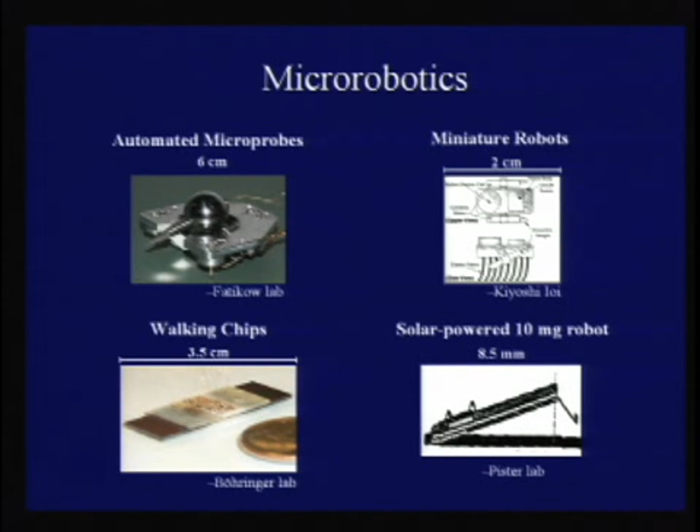And that's the big challenge that you face in microrobots, and it's a fundamental engineering or maybe even scientific challenge to think about. There are many components that you build on in this kind of work, and there's a long lineage of this. So I'm going to talk about some of these challenges briefly.

One of the hard things is how do you deliver power to tiny things? You can't have a wire to power them, because in terms of scale, it would be like having a mobile robot this big with a steel beam attached to it. So you just can't do that. You need some other kind of technique. And there are robots at this scale, but how can we get an order of magnitude smaller?

One of the technologies I'll build on is a device called a scratch drive actuator. I'll tell you all about this, so don't worry if you don't know about it. But the key thing about this actuator is that it's tethered—it does have a wire attached to it. So in some sense, years of work to get rid of one wire, but that wire is essential to make something that's not tethered, because I think a robot at this scale shouldn't be tethered.

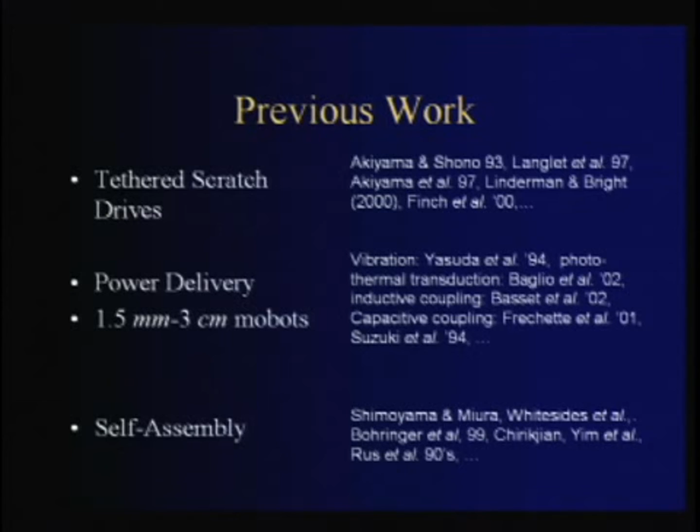Now, what can you do with microrobotics? This is kind of speculative, so I say possible—there have been a lot of interesting applications proposed. From my point of view, I'm interested in building something generic, a capability, like a car. The Model T didn't do very much, but it was clearly a transportation and hauling platform. If we can make a globally controllable tiny microrobot, we can haul things around and push them.

Some applications I think are most interesting—I'm in a medical school, so I'm very interested in biomedical applications. For years I've been interested in manipulation by pushing and pulling things, which is good to do at the microscale. My colleague Daniela and her students are extremely interested in self-reconfiguring robots that can change shape, and it's possible little tiny devices like we're making could serve that application.

But one of the ones I'm most interested in is self-assembly—how can you make a system that builds itself? If you think such a thing sounds far-fetched, the other half of my lab actually studies these systems from the biological side.

Here's one such self-assembling system. Like all proteins and protein complexes, this is self-assembling. This is the structure of an enzyme that we solved using the experimental technique of X-ray crystallography. It's an enzyme from a waterborne parasite, and it's actually 4 proteins that assemble together to do their job.

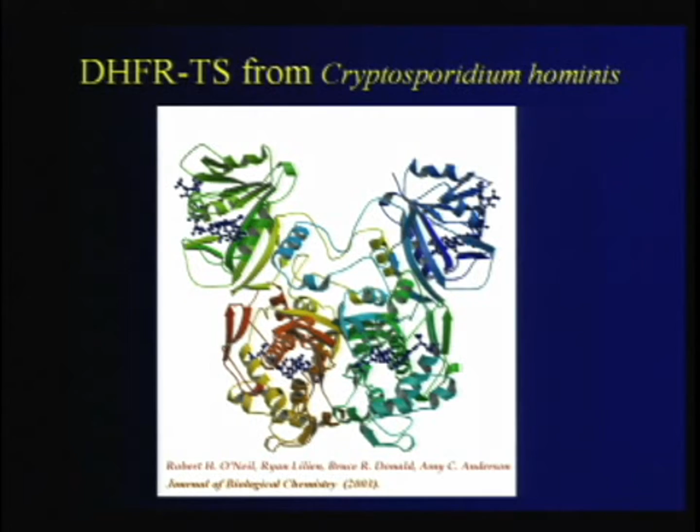The interesting thing about these systems is that they make the assembly themselves—there's no one directing this assembly. One thing you learn studying biological systems is that, unlike the very simple assemblies we can do now in nanotechnology, which are usually driven by something like hydrophilic and hydrophobic effects, proteins and other biopolymers are extremely active participants in their own self-assembly.

It's possible we could take lessons from that kind of control, and maybe build nanoscale structures that self-assemble using some of those techniques in the long run. So I'm very interested in the long run at the confluence between biological self-assembly and systems like this, and the kind of things we can build now, which are obviously much more primitive. But there is a theme there that I think converges.

So back to the engineering challenges of trying to build microrobots, and what are the things that you have to do in this kind of program? Design is a key issue, which I'll talk about some. I've already mentioned how do you power devices that are this tiny - that's a really essential, difficult problem. There are a lot of problems that have to do with designing good processes, the chemical and baking processes used to make these things. The computer science issues typically come in here: how do you control these devices, how do you deal with parallelism, how do you deal with a distributed system like this? And finally, if you've solved these things, you can start to talk about self-assembly and self-reconfiguring.

Now, where are we now? Well, we have some interesting devices. We have some pretty good strategies in this area of control, programming, and distribution. And I think we're just starting to get at the issues of self-assembly and self-reconfiguration at this scale. Obviously, there's been self-reconfiguration at larger scales, but to do it at this scale is quite tricky. So I'm going to talk about some of these challenges, but I'm going to try to do this mostly by showing you pictures so you can get a flavor for how we think about this.

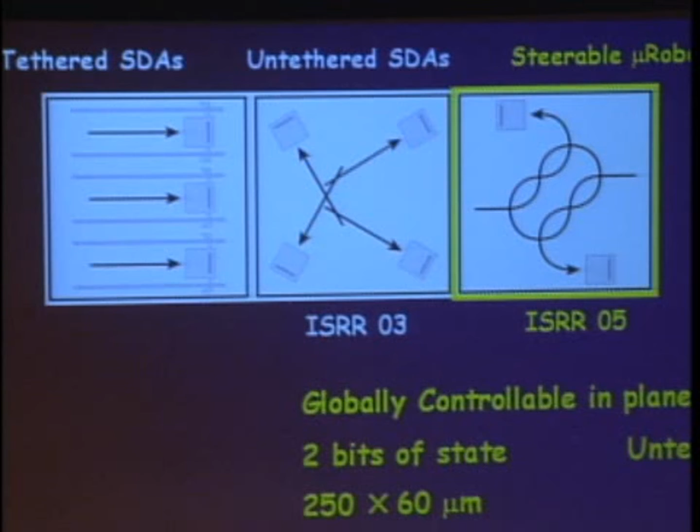And then the next breakthrough was to get things that could go on curvy paths like this and steer. It sounds kind of trivial in a way - for a macro robot, you just put a wheel on it or something - but it's very hard with microrobots.

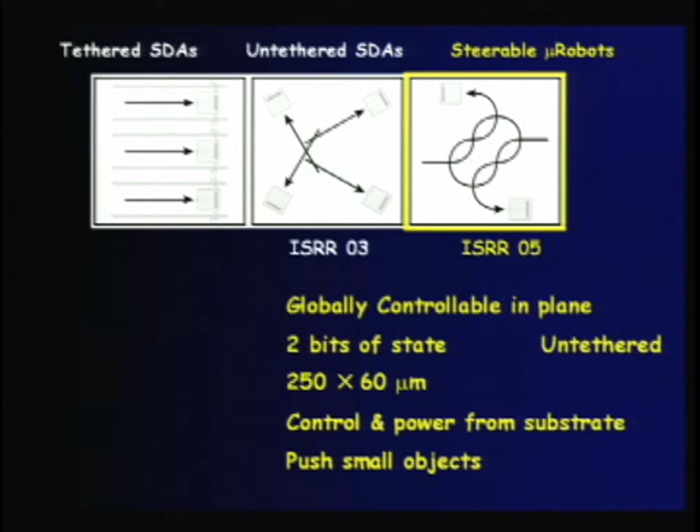Now this is kind of how we think about, as engineers, our devices in terms of their size and how much state they have. One thing is, if you think of this progression from fixed lines to any lines to any curvy lines, in some sense we try to quantify these by the degrees of freedom that we can reach. So the space you can cover here is you can be on lines, but they're set at the time of fabrication - you can only be on lines that are etched into the road, so to speak.

Here you can do arbitrary lines, but they have to be straight, so that's kind of a drag. And here you can do any curves and lines, but there is a turning radius, a minimum turning radius. This is something more, I think, like a car - there are no tethers, and you can steer it around. And that's really the advance that I'm going to talk about today.

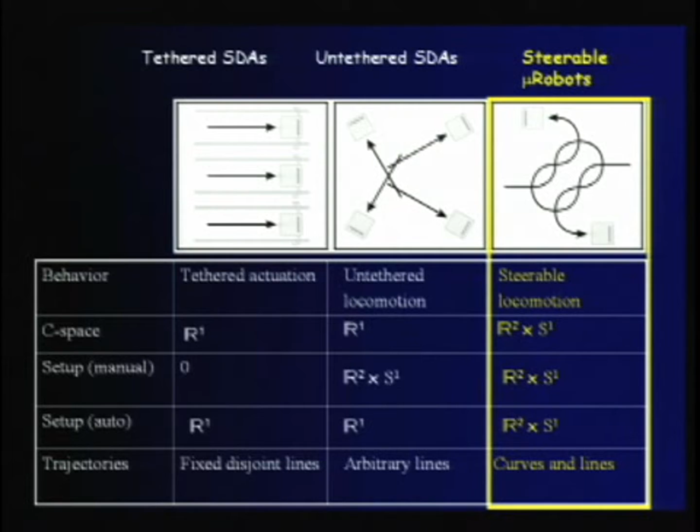But I'm going to tell you about this part of our work too, because it's a step along the way. It sounds kind of painfully slow - first you make a car that can only go straight, and that takes years, and then what you do is you spend years making it turn. But that's kind of how it works in this area. And there's a technical reason, that you'll actually understand by the end, that has to do with a limitation of these devices.

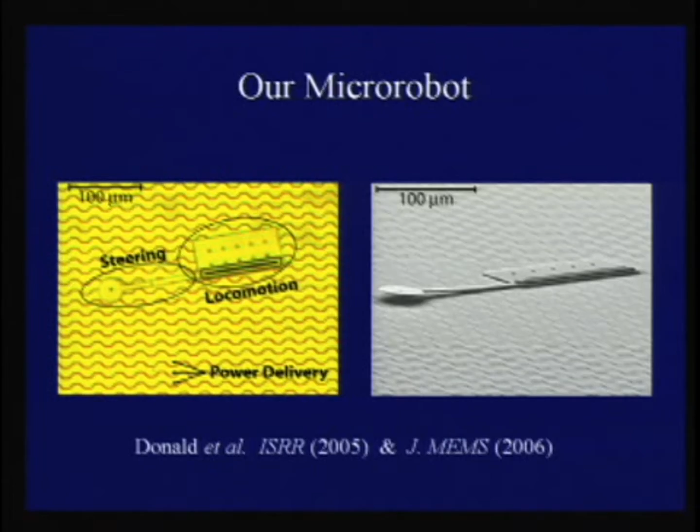And this is a picture through the scanning electron microscope, which has more resolution. If you're interested, I also made some 1,000 scale models you can come look at. These are made with FDM machines. We don't use these for prototyping, but they're nice for demos. This arm is curved up a bit using stress engineering—you can't do that with FDM, so that's a lesson there. But it's curved up like this, got it backwards, just like this, sorry. You can look at these later.

Just for comparison with these guys, this is the width of a human hair. So that's pretty small—definitely come up and play with these, take a look if you like. So let me talk about these a little bit and how these devices work, and show you some videos.

I'm going to lead you along the path that we took here. So let's talk about going in a straight line first—that's locomotion. Everything's very much broken down in these funny ways.

The goodie you're trying to get out of this is: can you build something an order of magnitude smaller in length and two orders of magnitude smaller in mass than the previous big things I showed you? The task you can do with this is push tiny things out of the way, and it's globally controllable, meaning you can steer it to wherever you want. You can't steer it differentially wherever you want, but you can steer it eventually.

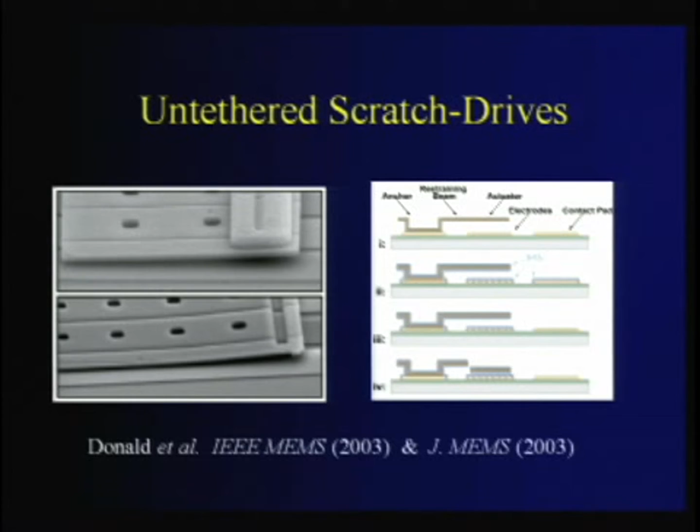So the big challenge we had to face first is: how do you break this tether? How do you make something that doesn't have a wire attached to it but can still go? This is a close-up of what this looks like, but let me give you an idea. So how does a scratch drive actuator work? This is work from Fujita's lab a long time ago.

The idea is you make a piece of polysilicon like this—it's a kind of conductive material. You have insulation here between a substrate and this thing, and this little bendy part. This isn't drawn to scale; it's about 2 microns high. Now, if I put a wire and attach it right there, and then charge this guy up, he's attracted to this guy here, which is at ground.

That's electrostatic attraction—so a lot of things here are going to work electrostatically. Electrostatics, that's static electricity. You can build microrobots using electrostatics, but you can't build washing machines and cars. They only work at this scale.

But it'll be attracted down, and then it snaps back up, and it takes a little step forward when it does that. That step is 12 to 20 nanometers—a nanometer is a billionth of a meter. So we're at the nanoscale. And we can do this 20,000 times a second, so 20,000 hertz, which is pretty good.

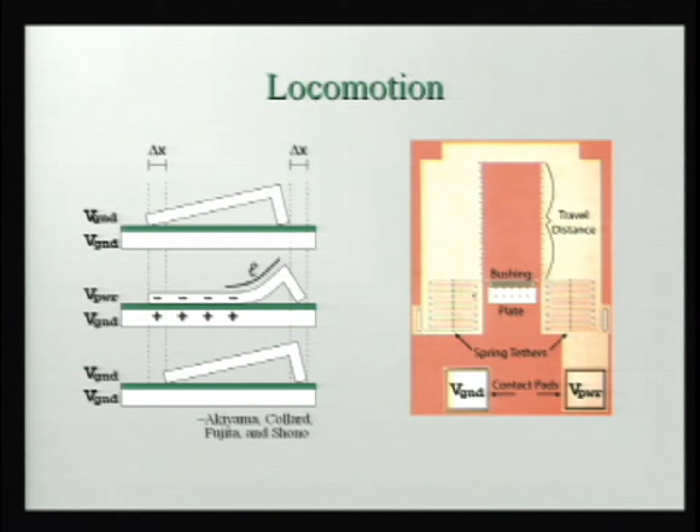So this will step along nicely if you do this. But you need this wire, right? Here's a picture of the setup—you have the little micro actuator here. And the wire, of course, you don't want a fixed wire, so we make a very stretchy wire like this, and the stretchy wire is going to bend.

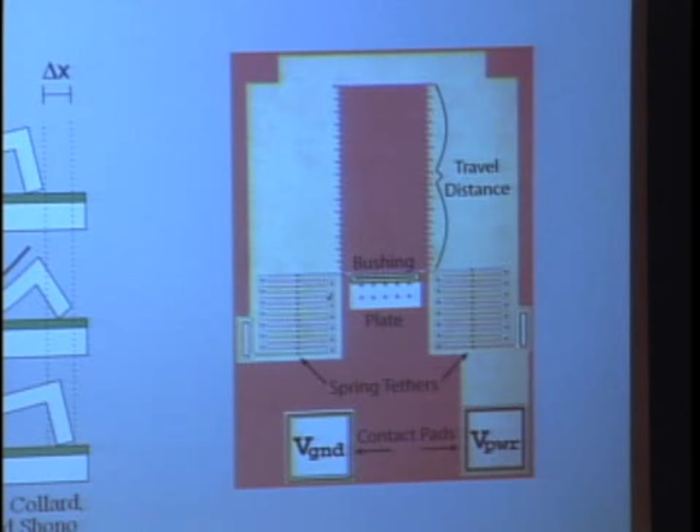Let me show you how this works. Here's a video of the real thing going. He's going to go forward like that, and snap back when you turn off the power. One thing you'll notice: these guys are essentially massless. You're living in this sort of pre-Galilean universe where there's no inertia, no mass. This guy's going to go forward, stepping forward—this is the wire that gives you power.

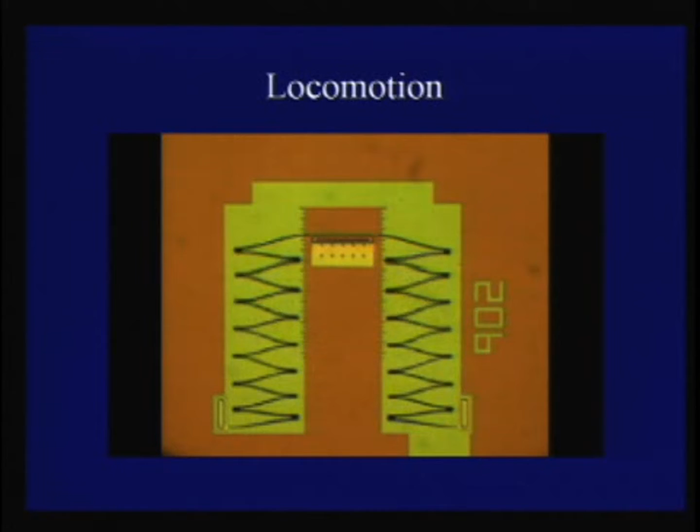So this is a scratch drive actuator, and this has been done. These are ones we built, but basically all we did is modify the design in the papers to work on a public foundry. So if you want this, we'll send you the file, and you can pay $3,000 and get 10,000 of these for your bathtub. Okay, so that's a scratch drive actuator.

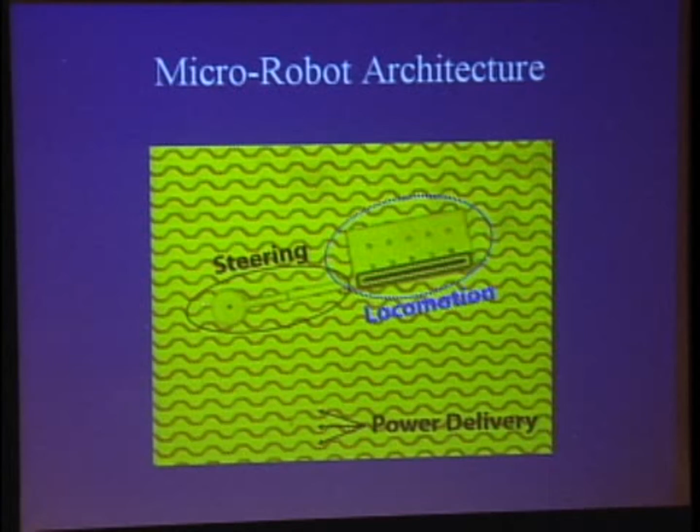How do we get rid of the tether? That's sort of the key thing. So here's the idea: build a capacitive coupling, based on a capacitor. What you do is make a big grid here, but the grid is imbecilically simple.

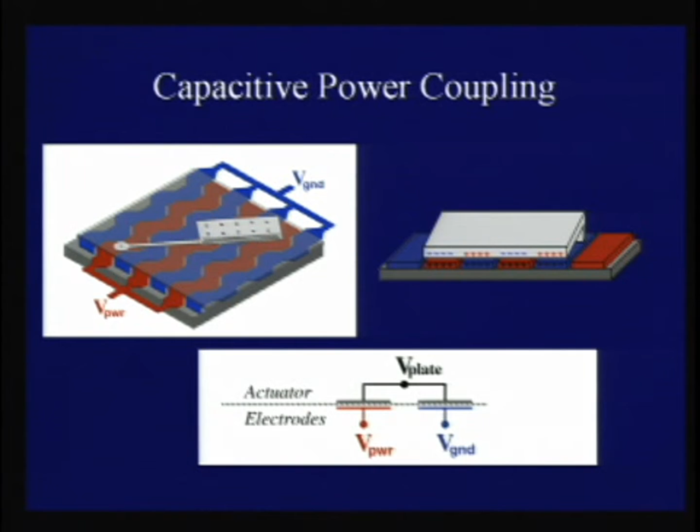It's just a series of stripes, plus and minus, and we run AC through that. We either insulate the grid or insulate the bottom of the micro actuator, and then we get a capacitive coupling. When there's a charge in here, you get the opposite charge up there, and the guy's attracted. But you don't get current flow because you have an insulator. So this is just a capacitive circuit, and this guy will flex down. So this is nice - there's no wire. You have a grid, but there's no wire attaching this guy. So that's a good idea.

How does this work? Here's an early video. So here's the microrobot, about 60 microns long. He goes pretty fast. By the way, down here you see the frequency you're driving at. Here he's going to push a piece of dust or little debris out of the way. So here you see the robot actually manipulating its environment. And here it's going not straight, at an angle there, which is right - we can go at different angles.

This raises a different point, which is you want this guy to go at the same rate no matter which way he's turning. That's sort of what you want to have happen here. So it turns out that's sort of a cute little computational problem.

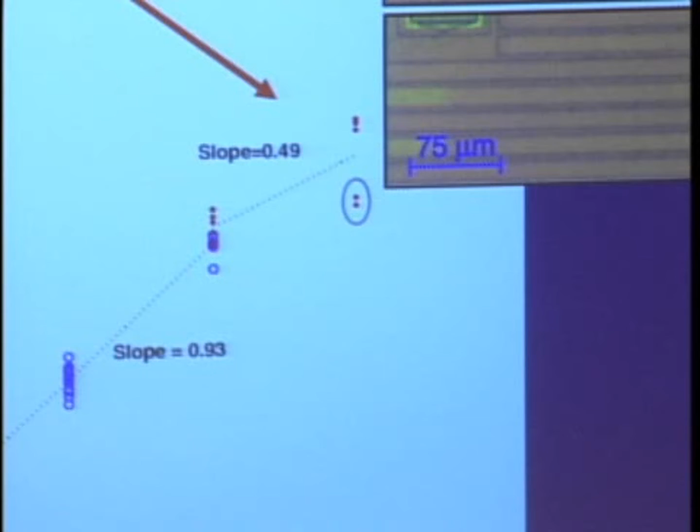I want to show you that these guys can go pretty fast first. They can go about 2 millimeters a second. If you scale that to the length, that's about 80 kilometers an hour. That's pretty fast. And here they're actually going - they ran off the wafer and they're running on the control wires on those data points. So these things are pretty quick.

I want to talk about one of my mentors, Jerry Sussman here at MIT, who once said, well, we had this little problem to solve, but at that point it's mere computer science. And what he meant by that was we've actually reduced it to something we actually know how to do, which is solve a mathematical problem.

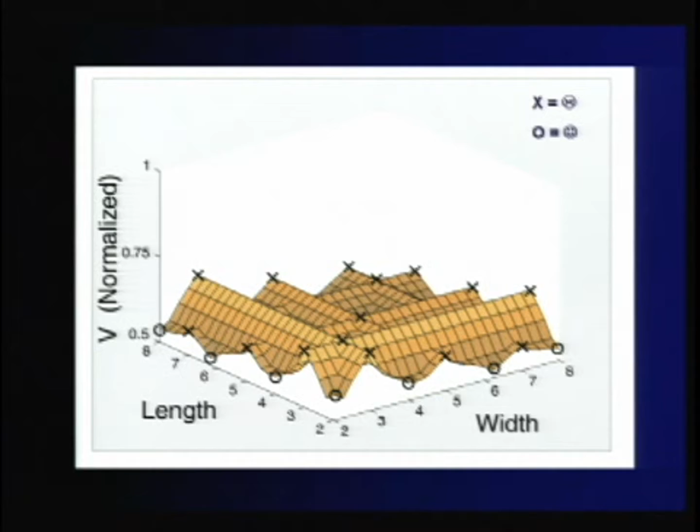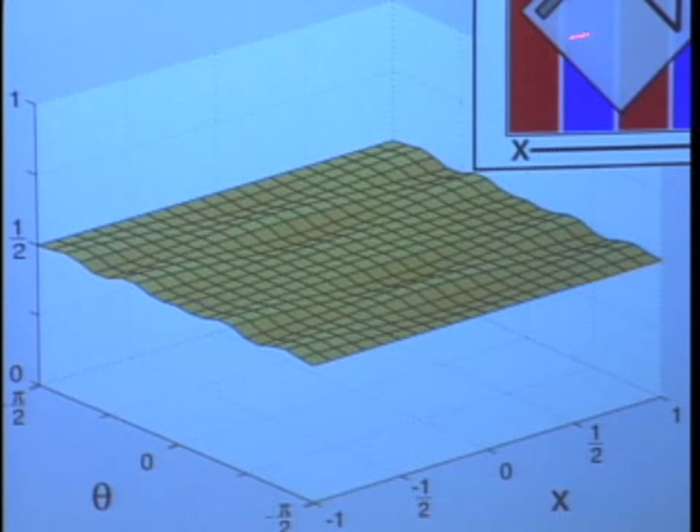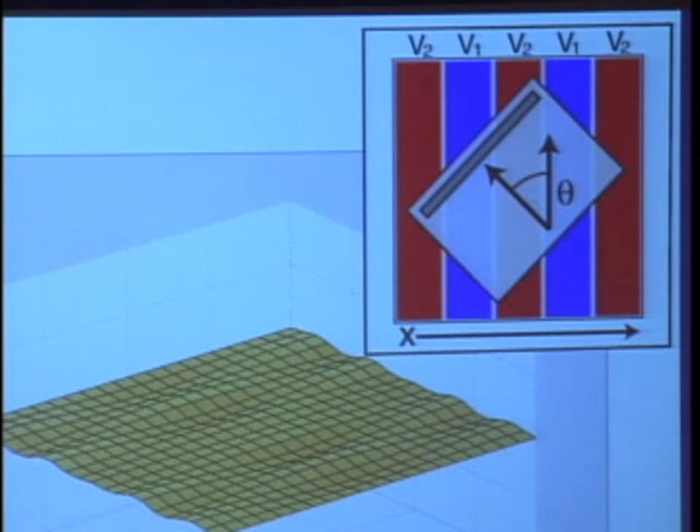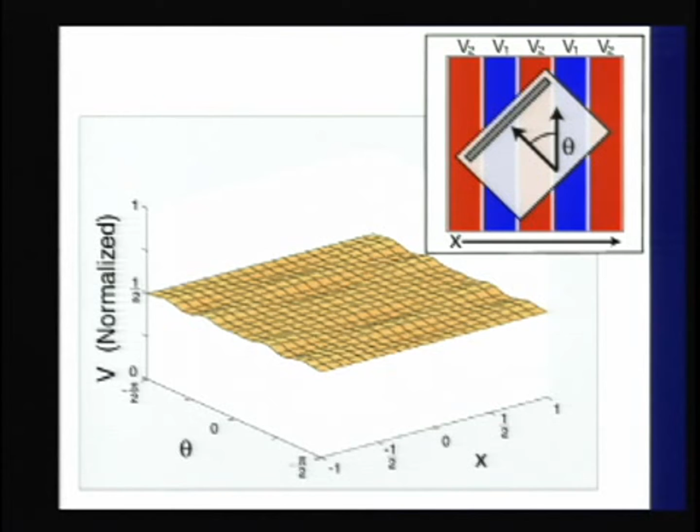If you select for a good point with little variation, this is what you get in simulation and in practice. So here the axes mean different things - this direction doesn't make any difference. X is that way, theta is a rotation. Here's x and theta. As I turn and move back and forth, I get very uniform power delivery through the capacitive coupling. So what you're designing here is the dimensions of the robot relative to the dimensions of the grid so that I get uniform power delivery. And if I do that, you can move in any direction essentially at the same speed. So hidden underneath here, there are some little computational problems that are kind of fun teasers to solve.

So we still have a problem. Here's a poor little robot - we call him the Kaiser. And he's struggling to get over these electrodes. It just breaks my heart to watch this because it's so difficult for him to do this. Let's watch again - this is really painful for someone who loves his robots. He's working as hard as he can, struggling to get over these things.

There are a couple of reasons. One is they're a little bit bumpy, but there's a deeper problem we have to solve, and I want to tell you about that. I think it's kind of a fun problem for engineers and people who like engineering to think about. The issue is these gaps between the electrodes. In a gap between the electrodes, you have a fall off in your power delivery because there's nothing there. So what's the effect on the robot? Well, this is an exaggerated picture, but you see the tail is much closer to the surface than the bushing over here, which is this part.

That effect is quadratic with the distance, because electrostatics are quadratic with the distance between charged things. So this is the electrostatic pressure, or the effect of the electrostatic force, and this effect is exaggerated at the tail. It's bad if your tail falls in the gap, because the force goes down.

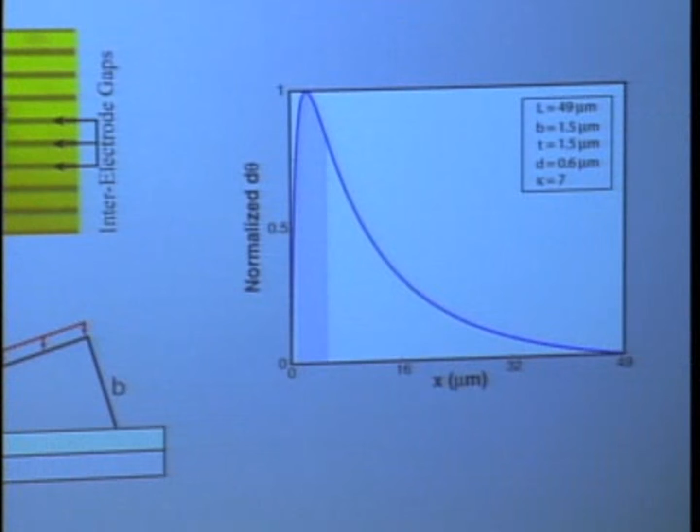So we have another cute little computational problem trying to fix this. We make a hexagonal grid, and I can make these grids any way I like, where you have plus and minus like this. What I'm trying to optimize is that in the worst possible situation, my tail does not fall entirely along a gap. So here, there's a tail, but it doesn't fall along a gap.

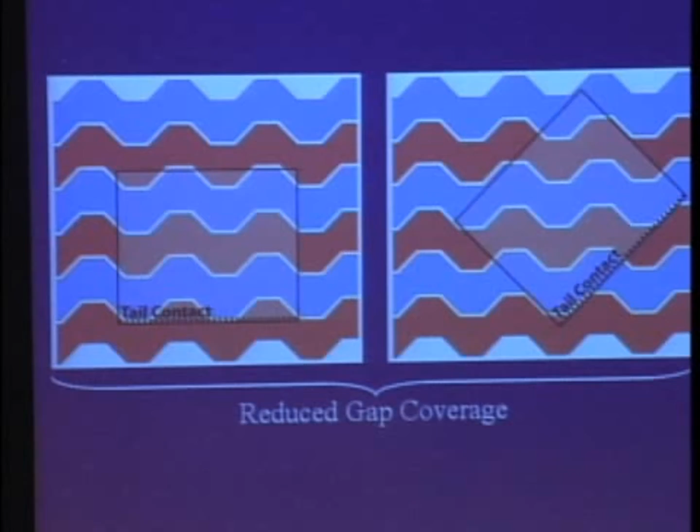It falls along some gaps, but not all. Here's another bad position, but I'm not entirely within a gap. So I reduce the amount that a tail can fall in a gap, and then I still have to do the same trick as before, optimizing the width and length of the microactuator compared to the spacing of the grid, in order to make sure I get uniform power delivery and consistent applied voltage no matter what the orientation and pose is. So this turns out to be another cute little computational problem that you can write down and solve, and if you do that, you get a result like this.

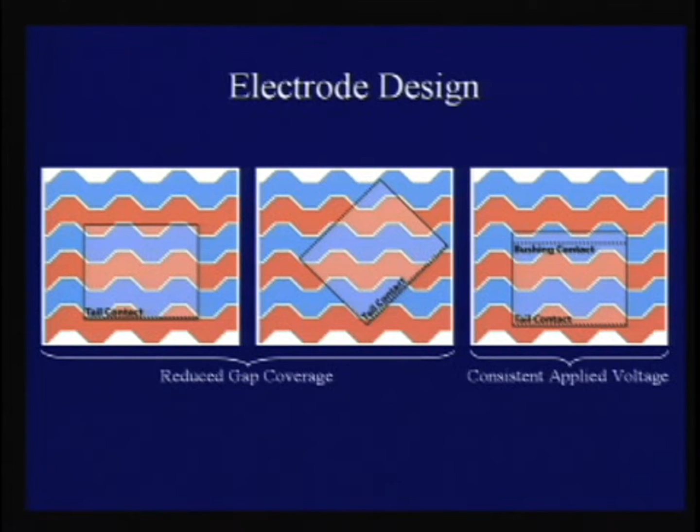So here we've done that. We have this grid, and here we can go in any direction we want, and things go very nicely. This is beginning to look more like little bugs, but they go in straight lines. So that's what we sort of wanted to have.

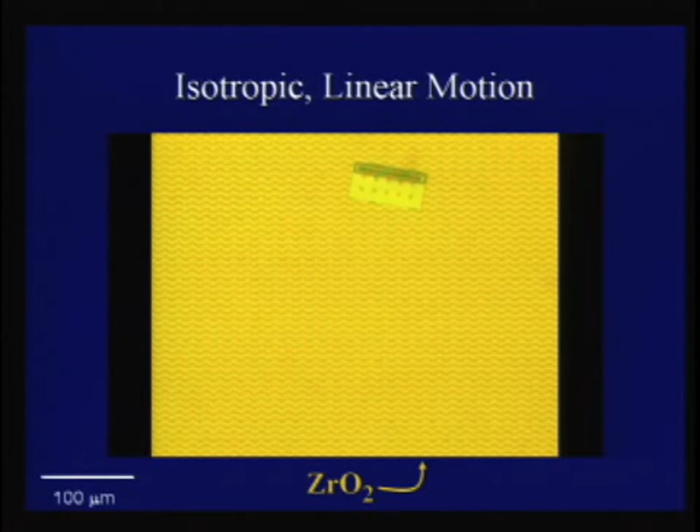Now the other thing we did is we used a different material. We insulated here with zirconia, which is zirconium dioxide, a nice material. It's called a high K dielectric, so it's a good insulator even when it's very thin. It also has good frictional or tribological properties, making things zip along nicely. So there we got motion in all the compass points, and we have something that's beginning to look a little more like a robot, even though it only goes in straight lines. That's sort of a good thing.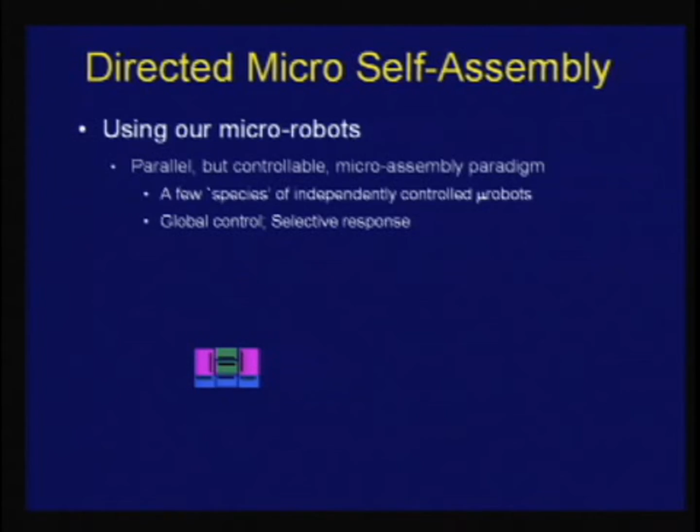I'm going to use a trick that I'll define later called voltage selective actuation, which means by changing the voltage of the pulses, I can make some guys go and some not. I can do a primitive little assembly like this - notice this one moves last because of the voltage selective actuation. So I'm going to build a little structure here by moving these guys all at once, and they're going to interact through compliance to do a simple little assembly.

Not the kind of assembly you would get written up in the New York Times for, but still an assembly nevertheless. So this is 80 microns on a side here, this is 60 here. So that's not a trivial thing to get to happen.

So because you have compliance, even with linear actuators that only go straight, you can actually put together a little shape like this, which is nice. But we can do much more if we can turn.

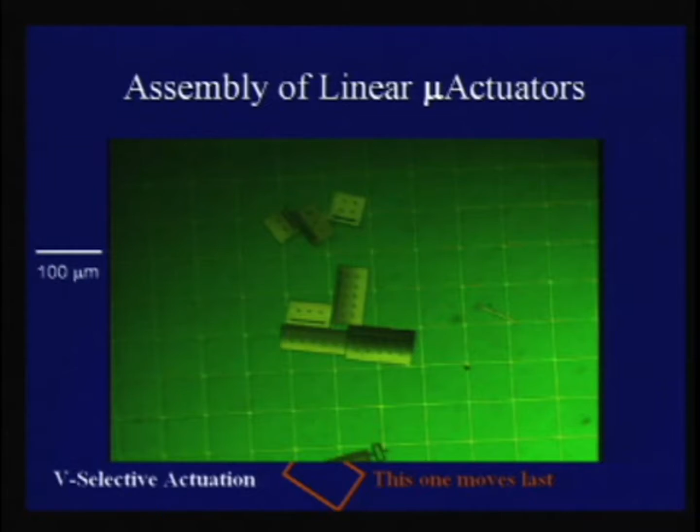So I want to turn now, so to speak, to how we make this thing steer. I've given you a flavor of how you design a thing without a tether that moves in straight lines - probably it's an actuator, not a robot. Here's a thing that's more like a robot. Let's talk about the steering.

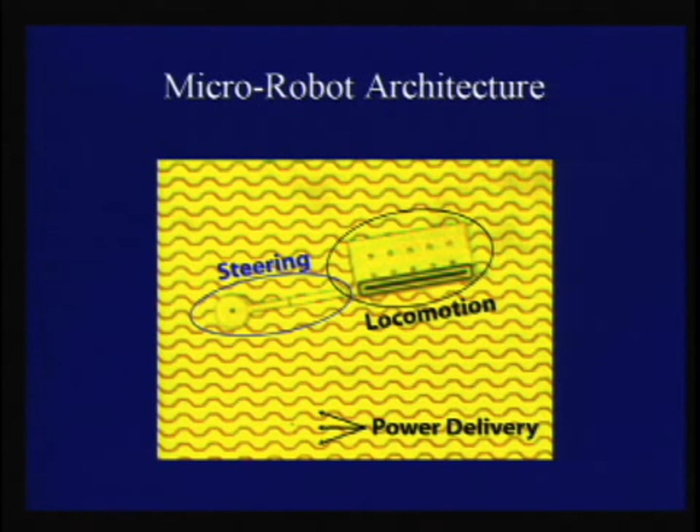So here's the arm here like this, and here's a close-up - this is the optical microscope picture, and here a close-up scanning electron microscope. What you can see is this has an interesting design: it's curved off the wafer like this, and it has a little stylus on the end to prevent sticking.

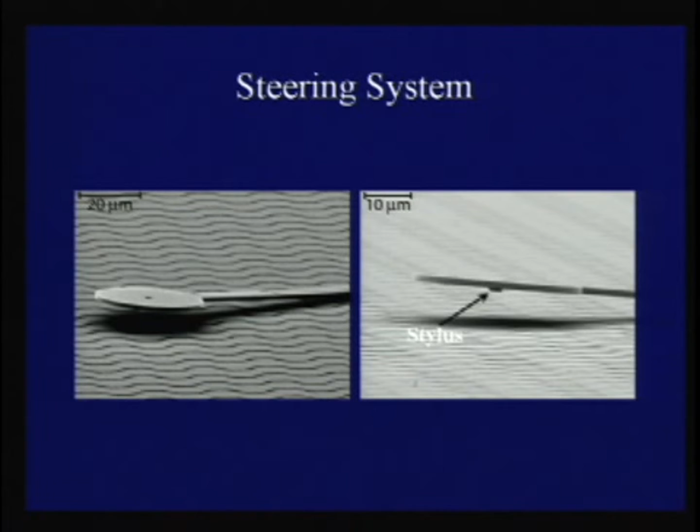So here's basically the deal: this part here - you can all come up and look at these afterwards - is going to creep forward, right, and this is up in the air a little bit. Now, I'm going to make them independently controllable using some magic that I will define.

And when this guy wants to turn, he's going to put this guy down on the wafer, and turn around that point the way if you're riding an off-road motorcycle, you put your foot down to skid around a turn. You put your foot down, skid around on your foot, then bring it back up. So forward, put this down, skid around it.

So that's what I want to do, but I have to make these independently actuatable. I can fabricate these, but it's actually a little bit non-trivial to do this, so let me talk about that a little bit.

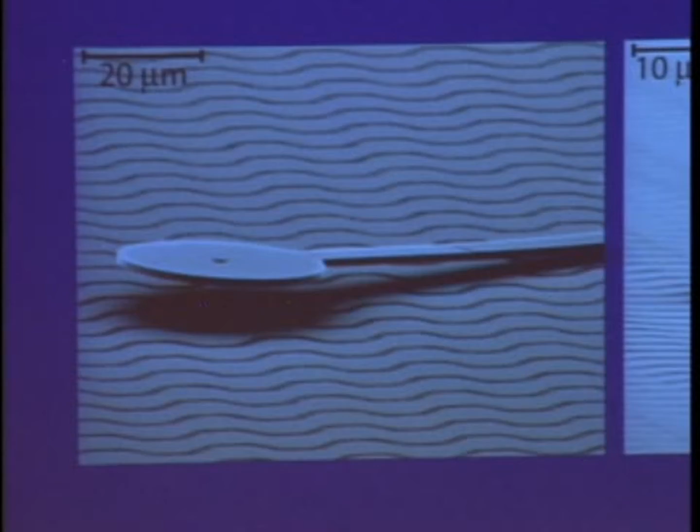So that's what I want. And again, we're getting a pretty fine scale here - the feature size down here is like a micron or so. So I want to just give you a little flavor for why you can do a thing like this.

So the one thing that's really great about these scale models is that the whole thing is connected - it's one piece of plastic. But the MEMS device is like that too - it's one piece of conductive polysilicon. So you have this thing where you don't have electrical isolation between the two actuators.

So the challenge we have to face is how can you independently control two things that are mechanically connected and electrically connected? How can you do that? We have to find some way to basically get around that problem, and the way we're getting around it is something like this.

But the key thing here is if you start the voltage out at 0 and you crank it up, it's going to sit there for a while, and then it's going to snap down. And that's the key thing.

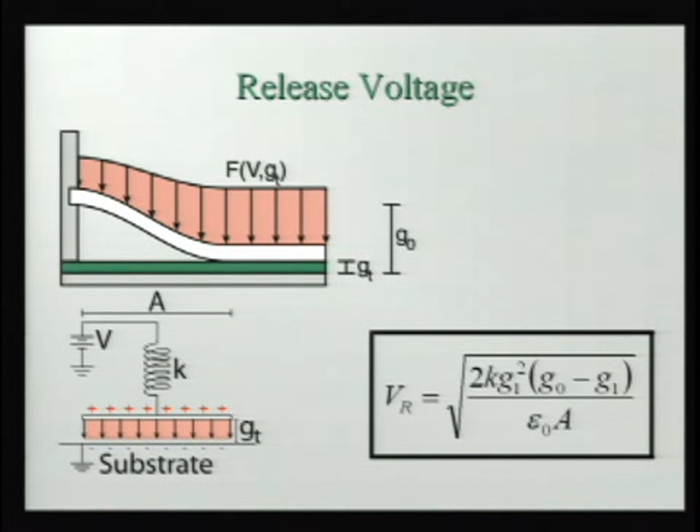So here's a picture of that. This is the release or snap up voltage, and this is also strongly conditioned upon these gaps and the area and things like that. But the key thing is that you can model this, so you can design something.

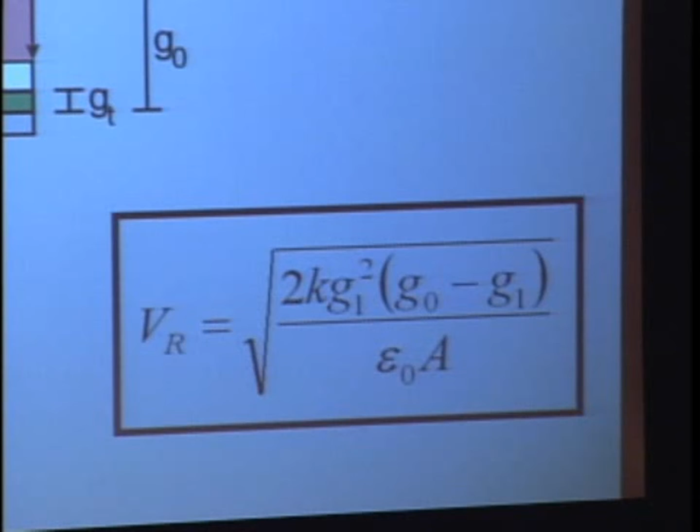The point is that the release and snap down voltages are different. The way to think about that is what you want to optimize is the ratio of snap down to snap up. Here's a little graph: here's my deflection, the height of my finger, and here we have voltage. As I start up here and crank up the voltage, making it larger, I just sit there for a while, and then boom, I'm down. So I back off the voltage, going like this, and then all of a sudden I come back up. So I'm storing state in these loops, this hysteresis band. And that's the key thing here, if I can optimize this.

Now that's the idea, but what's the practice? All MEMS processes, but particularly the ones we use, are very good at controlling in fabrication the x and y dimensions of your devices. Those are your dimensions, like x and y and so forth. But they're really lousy at controlling the z dimension. And that's a huge problem. How do you do that?

So what we do is we make them, and then post-process them using what's called stress engineering to try to get this gap exactly the right height. In other words, to optimize this snap ratio here, a little high school algebra, I have to make these gaps exactly right. So I need fine control over that, so I have to invent a process that allows me to do that control. And that's going to be stress engineering using chromium.

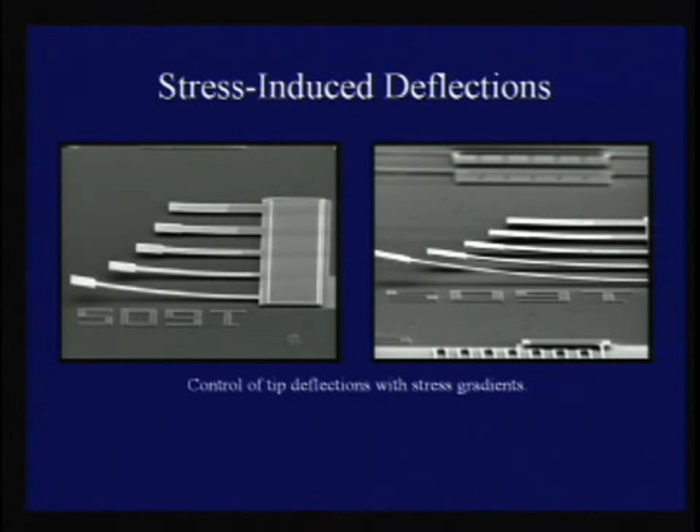How does that work? Basically, here's a little test device. I'm going to put chromium on these guys after I've made them, and then bake this in various ways, and then it's going to curl up. By depositing different amounts of chromium under different conditions, I can get really any shape that I want within limits, and stress engineering is going to give me really fine tuning. So by doing that, I can stress engineer these devices to have really good snap ratios, which is what I want.

Okay, so before I show you some videos of this, just a little more about the processes to make these things. This is a truly amazing set of technologies, and this is my student Igor in our lab working hard. Let me just point out some of the things that we have to do. I think it's just interesting to sort of see this, though I won't go into any depth about it.

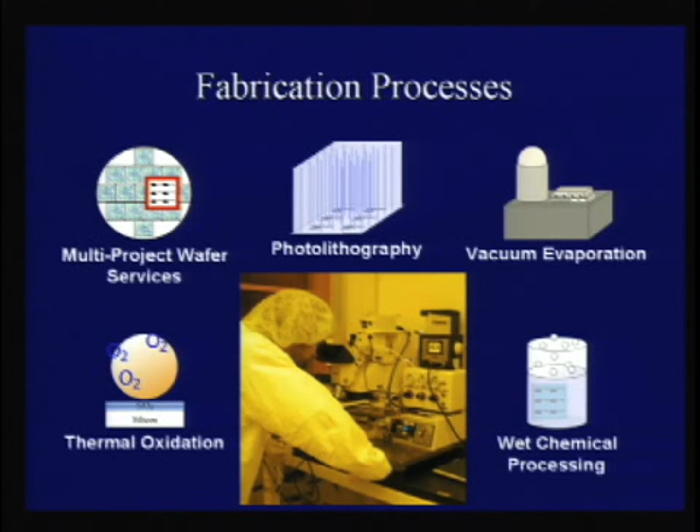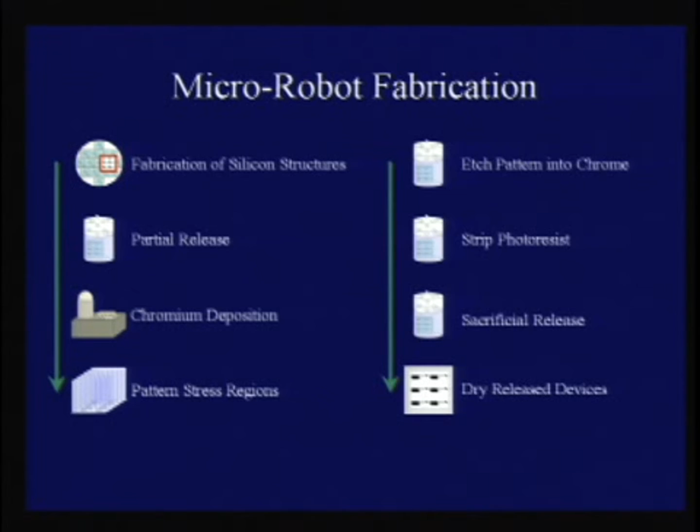These are different materials, typically polysilicon. So when they come out like this, we have to etch afterwards to release this thing. You see, we get quite fine control. For example, here's the under etch of the stylus. But basically, the way this happens is it's built up: we start with a substrate, and you deposit things and etch things away to get these shapes. And when they come to you, when they're done, you have to release them by etching away the sacrificial material.

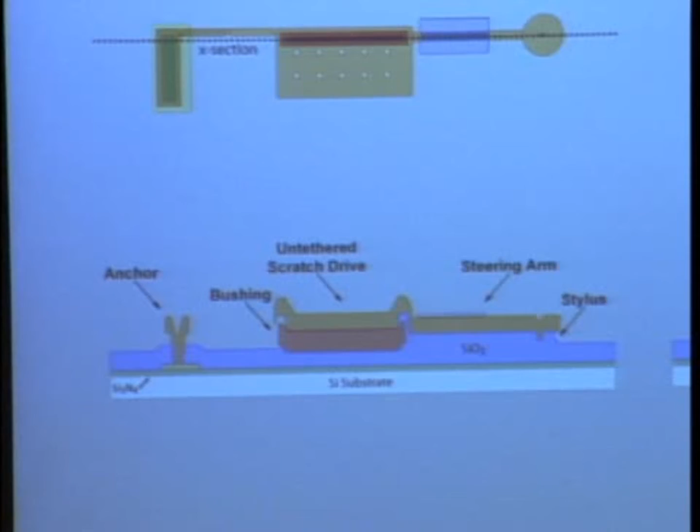So it's pretty interesting to do this, and I think it's interesting for you to see kind of what these various steps are that actually make these devices. And of course, the stress engineering happens in this area here, where we're depositing the chromium in order to pull things up.

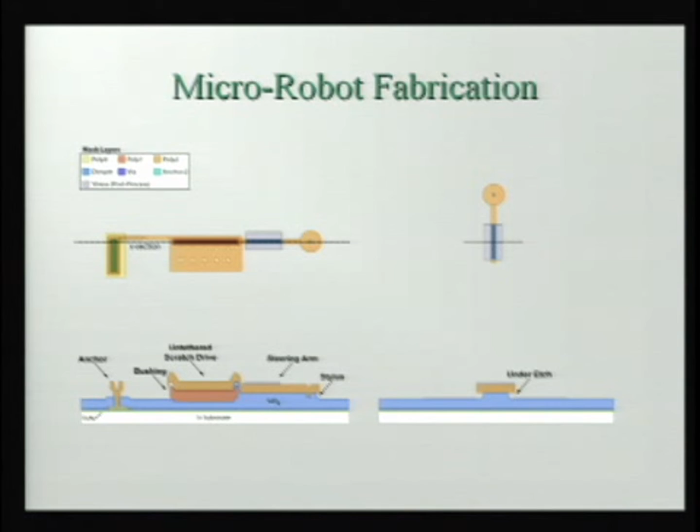Now, in addition to making the microrobots, we have to make what we sometimes call the environments, or these fields that they live on. And that seems kind of straightforward because it's just this grid. But actually, there's sort of some cute things I thought you might like to see about that, which has to do with the deposition of the zirconium.

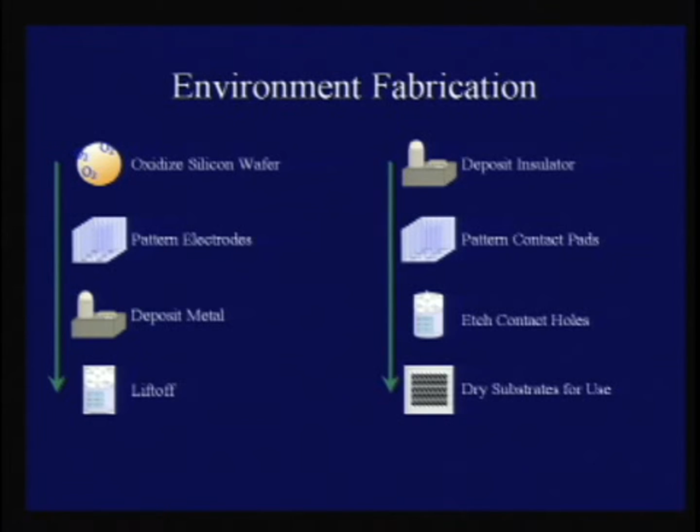So I drew a little picture so you could see it. This stuff over here is routine for electrical engineers—it's etching an interesting shaped grid so we can get good control over our wires. That's not a hard thing to do.

But this part is a little bit interesting. This is straightforward to someone in the field, but to you all it might be kind of cool. Zirconium is a metal, and you get it into this vapor phase by shooting it with an E-beam. If you just do that straight on with your electron gun, which you would never actually do, it coats everything in its chamber, including the electron gun itself.

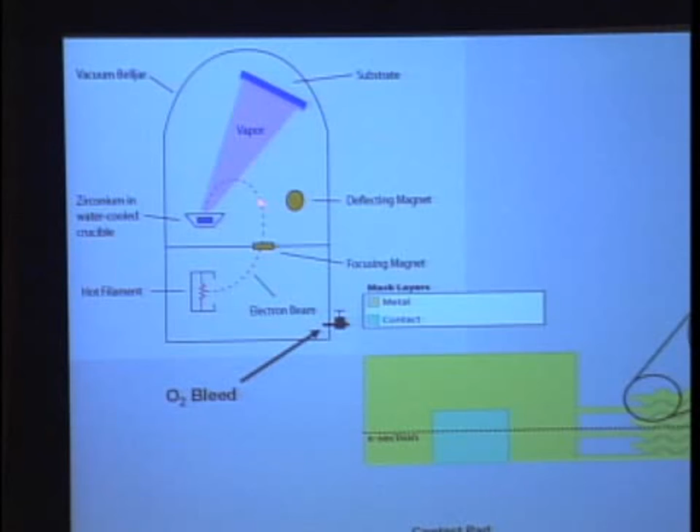So that's not the way you do it. You have a wall here, and you shoot the beam into the cup this way, trying to coat this guy. You actually bend the electron beam around like this with a deflecting magnet. I grew up on Star Trek, so I think it's pretty cool that what we're really doing here is bending an electron beam around a corner to do our process. That's a routine thing we do every day—it's kind of a neat trick.

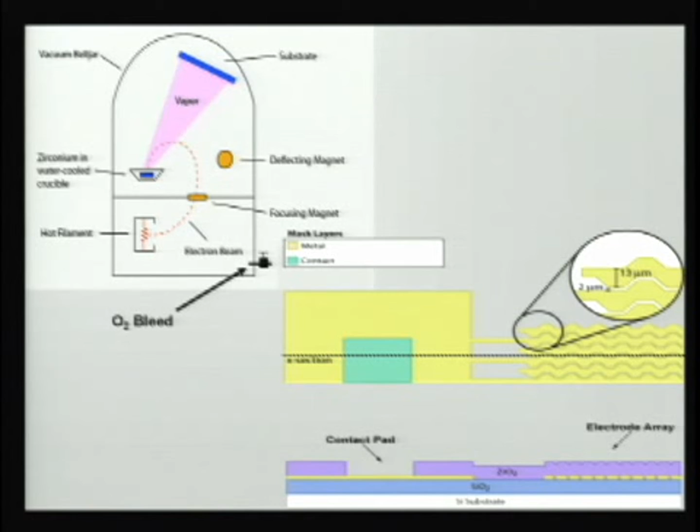So there are all these neat high-tech tricks you have to do for this stuff. They're really at the limits of everyday physics—somewhere between everyday physics and real physics.

So if we can do all that and make these devices, then we can start to talk about control of these things. How might this work? I'm going to describe this by literally waving my hands, or my pointer—can't quite reach. There are four states here: the scratch drive, which is the little actuator part, can be stressed or relaxed, and the steering arm can be up or down, because of this hysteresis thing.

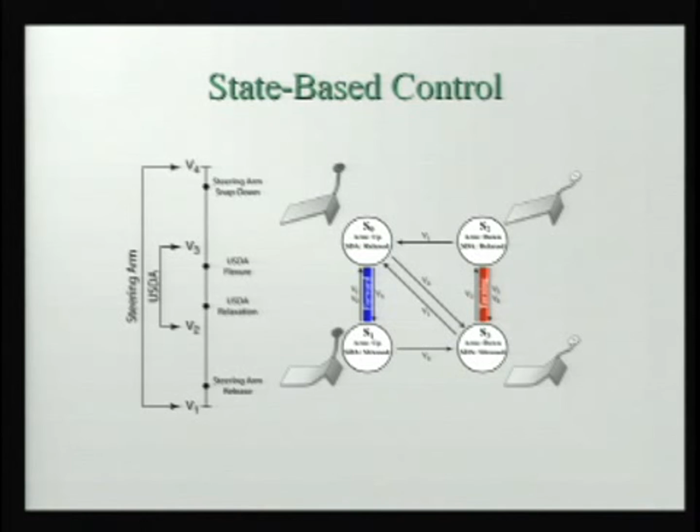The way I design this is by controlling these gaps, I can make the release and snap-down voltages anything I want within reason. So the trick is I make the scratch drive—this is USDA, untethered scratch drive actuator—operate in here, between small and big voltage. These are bracketed by the release and snap-down voltages for the steering arm, so I can actuate the scratch drive actuator without disturbing the state of the steering arm.

So here's how I go straight: I release the steering arm, come up here, and stress the scratch drive, doing this at 20,000 hertz. Now if I want to turn, I go up here, put the arm down. Now I go down here and turn, and the arm stays down. Then I release the arm, go down here, and keep going. That's pretty much the entire control strategy.

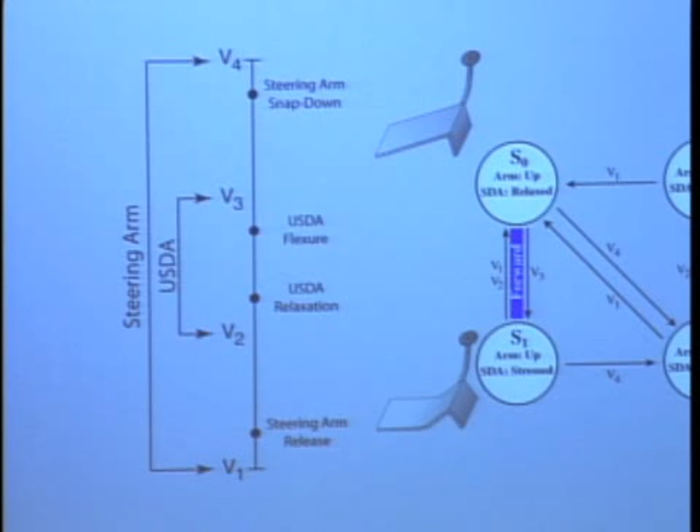One issue is you get all these charges, so things tend to charge up and not work. We have to minimize charge trapping in these dielectrics, so you minimize the duty cycles like this. The other thing is you have to flip the charge cycle, or polarization—so we do lots of plus charges for about 125 milliseconds, then flip the whole thing over.

It only cares about charge differential, so that's fine—you just flip it over like that, same thing for turning. There are some subtleties to getting this to work, but that's the right idea. That's basically the program that drives this thing. So how does this work?

So here's going straight—these are the primitive motions. There's the primitive up there. My advisor, who's still here at MIT, Tomás Lozano-Pérez, said I should never use the word primitive because it meant an old guy in a cave, so I had to put one in just because I was speaking here. So we can go straight, and we can turn.

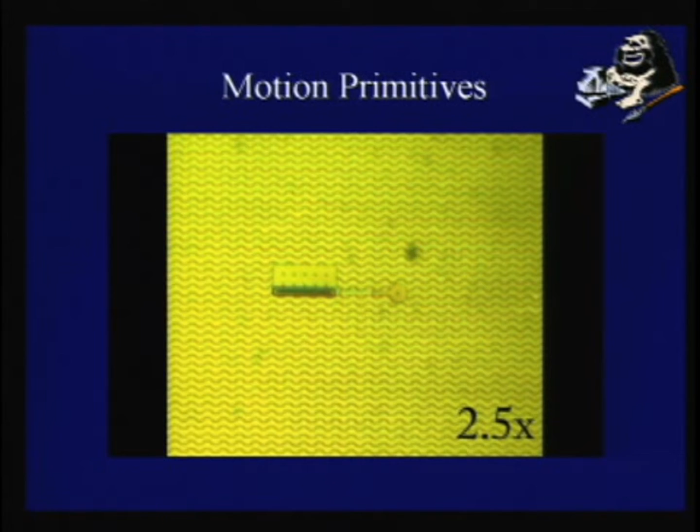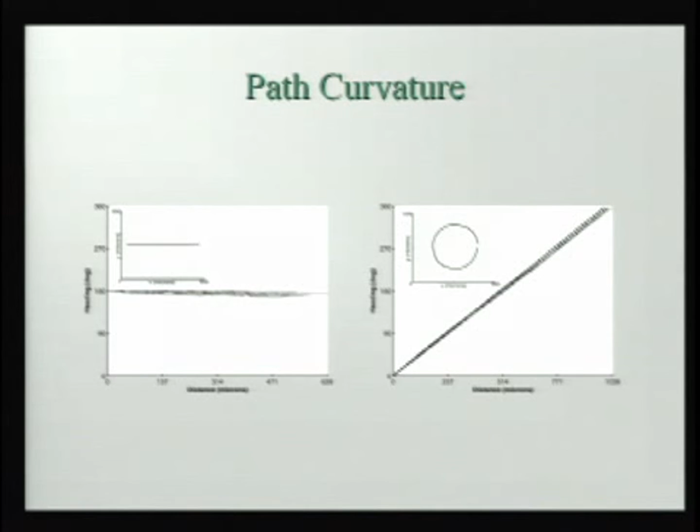Here's some data. Straight is pretty straight, turning is pretty turny. That's the right thing, and that's a formal scientific assessment of those statistics, by the way. That's what we call it - pretty turny is what we call that.

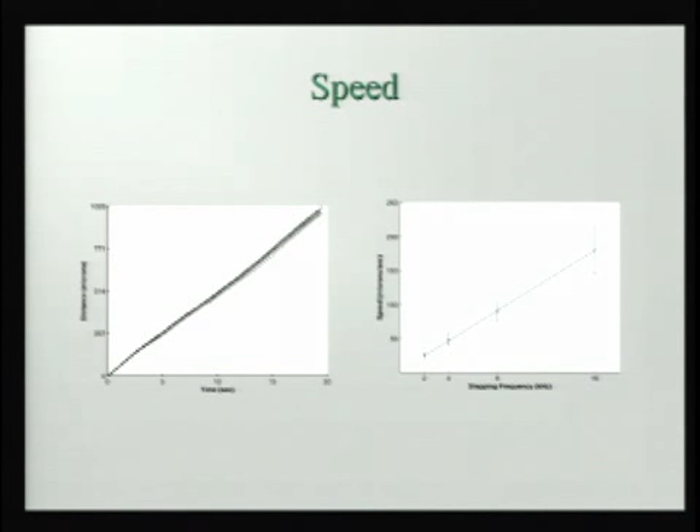It's not as fast as the guys without the arms. The arms slow it down, but it's still pretty fast for these devices. That's quite speedy.

Now, we don't have to always turn or go straight. We can interleave these, right? We can interleave the commands to go straight and go curvy. You do that at some frequency, and you can get paths that look like this. So we can get different radiuses here, radii. There's a minimum turning radius of 175 microns, roughly, for a steering arm this size. And then I can get anything bigger than that just by doing this. So there, I get some paths like that.

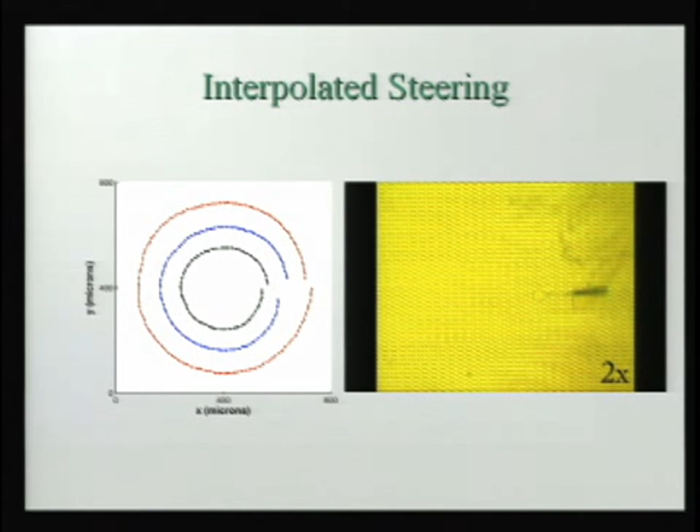Now, teleoperation is when there's someone looking at this and telling it where to go by just flipping a switch between the different waveforms. So here it's spelling out the Duke D.

Now one thing you notice about these devices - they can only turn left. That seems like kind of a bug, doesn't it? So we're working on that one, so it can turn right. But the thing is, it's not actually that big a deal.

So you can actually turn, if you want to go the other way, you do a jug handle. So there you go - it actually makes a better demo. Here's the correction: teleoperation means you're looking at that, so it's going to make a right turn by going around the jug handle each time. But it's not a bad thing to show that the device is controllable. So there it's going to go around like that.

It's going to do a couple more here. It's unusual to get this degree of controllability with things that are this small, and of course there's no tether. So that's kind of what we wanted - that's sort of where we are.

Now, there's lots more. I want to give you a flavor for it. There are lots of other things you can do, and I want to tell you some directions here. So one of the things you can try to do is, how about someone who can turn left and right? That's nice - so we've done that. And I'm going to tell you how.

Backing up would be nice. If you could back up, you actually get a non-holonomic system. You get parking, you get small-time local controllability, which means you can move in any direction you like. Building things, that you get snapped together.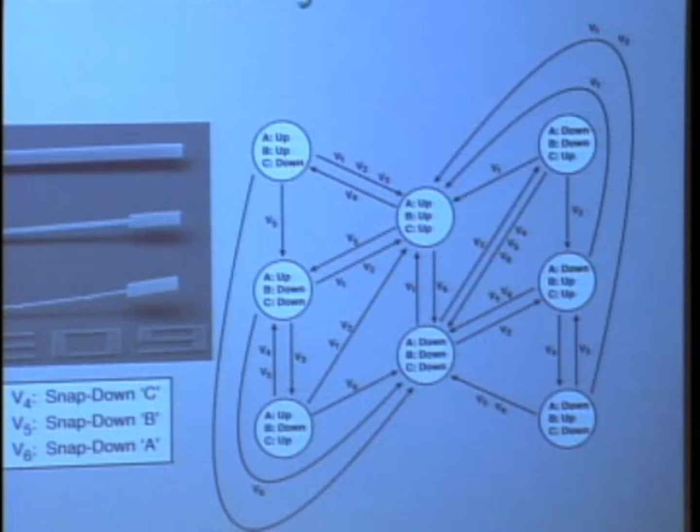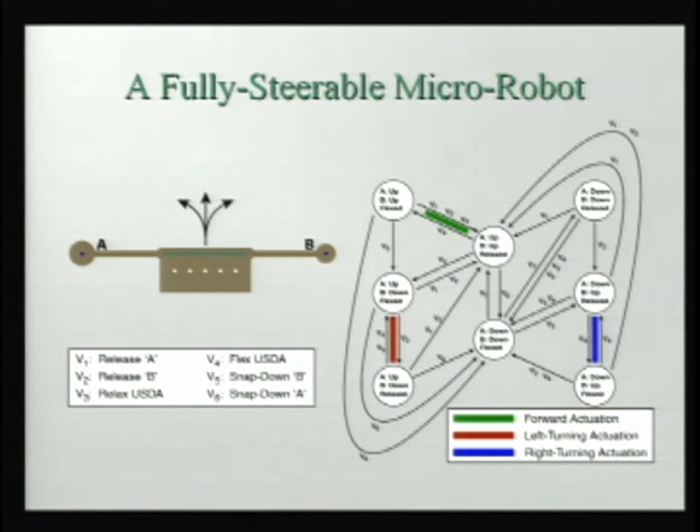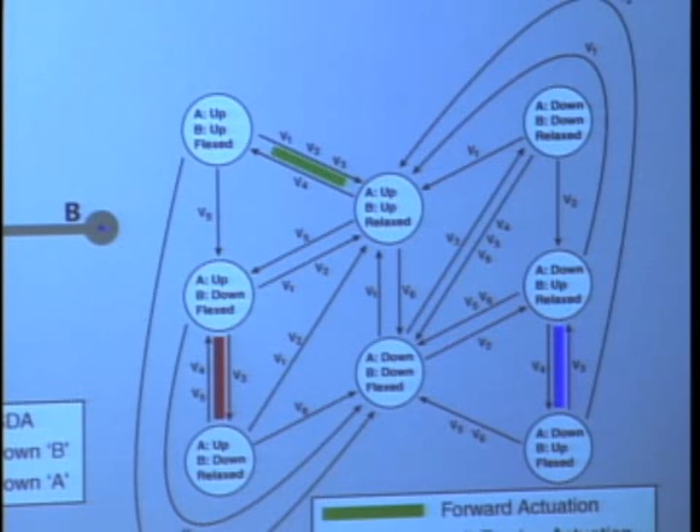But could we use that on a microrobot? So you see what we do: you put this one down, that's 1, then you put this one down, and so forth. So here is the fully steerable robot. Here's how this works: basically, one cantilever is A and one's B, and the different states correspond to - are you going forward, are you turning left, are you turning right? Basically, forward actuation is going back and forth like this, and then you do some transition to turn like that, and so forth.

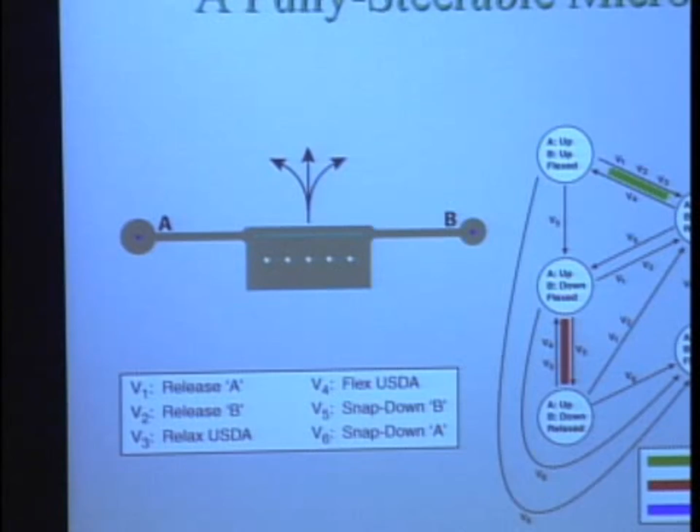So that's sort of how that would work. So that actually is doable, which is kind of neat. But I think it's kind of cooler for you all to see concurrent operation, so I'm going to concentrate on that.

So what about 2 or more robots? That's a good thing to do. Here we have exactly the same state diagram. We're very parsimonious in how much work we're doing, i.e. we're really lazy. So here we have the same state diagram, and here you see what behaviors it can have.

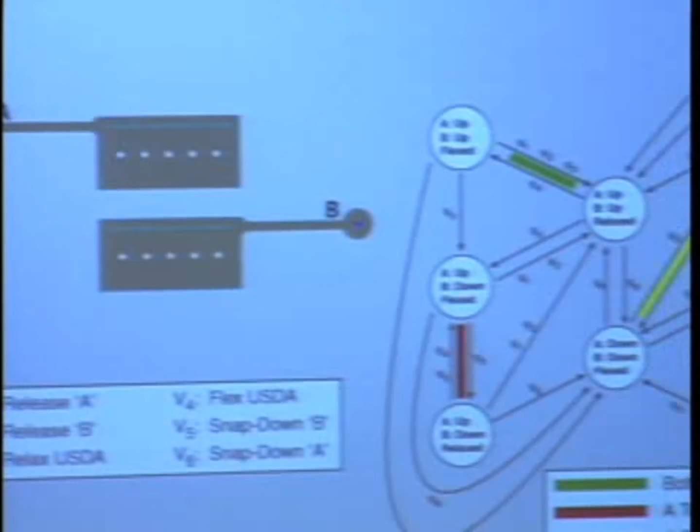It can go forward, both forward at the same time. One can turn while the other goes straight. That first one can go straight while the other turns, or they can turn at the same time. So we'd like to get these 4 behaviors working together, and let me show you how we're doing on that project.

So I'm going to show you a video. It works a little bit better outside of PowerPoint, so I'll do it that way. These videos are each about a minute, and they're kind of less sound-bitey, because this is sort of the bleeding edge. But I think you'll probably still get something out of them. So let's see what we can do.

So again, here they're both turning at the same time. These are different, if you will, species, right? They're turning at the same time, at different rates, because they have different length arms, basically, and different characteristics.

Now what's going to happen is this one goes straight while that one turns. So I'm going to give you all 4 behaviors of this independent control. And now we're going to have them both go straight at the same time. And now they both turn. So we're going to get all 4 of these.

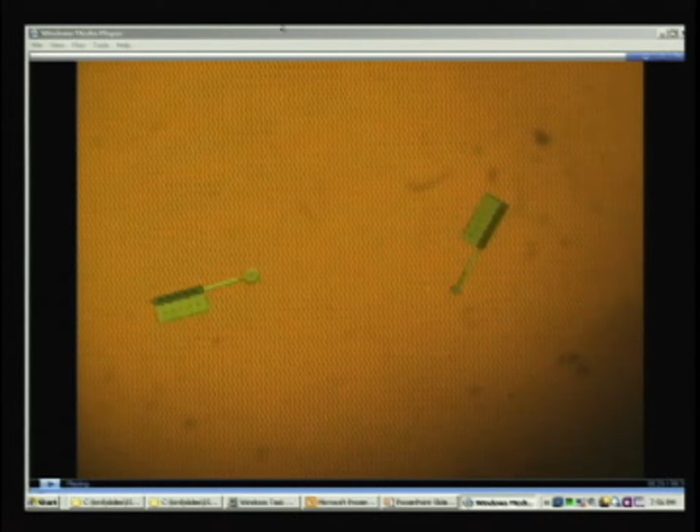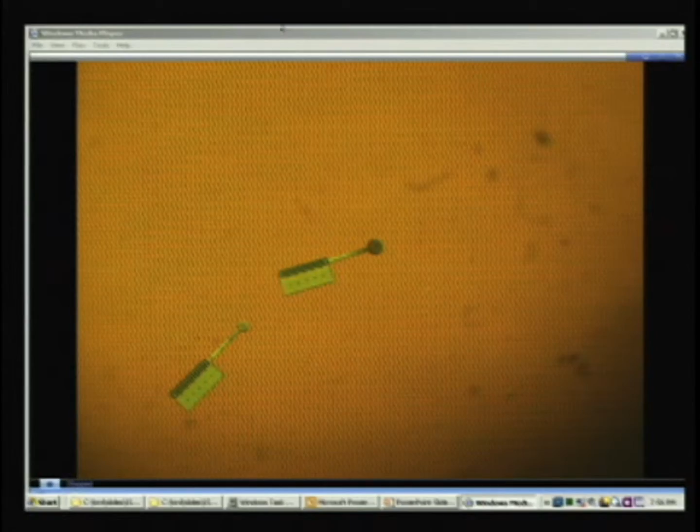What's kind of interesting about this, let's see, now this one turns while that one goes straight. And that's the end of the movie. So what's, I think, kind of cute about this is that we have global power delivery, we have a global control signal, but we're getting very selective and independent control of these guys through our scheme. I think that's a cool thing to do.

Let me show you another one. Whoops, I don't want that. I want this. Yeah. At least it isn't some embarrassing thing.

Let's try that. Okay, so I do have a video on the bidirectional robot. It's kind of straightforward, it does it. I want to show you the power of this by showing you how you can assemble a bidirectional robot from a left-handed and a right-handed guy that come together. It's sort of more suggestive than conclusive, but I think you might enjoy seeing this.

So let's take a look. This is a little sketchy in some ways. Here we have 2 guys. It's going to be similar to before, but at the end they're going to interact by assembling. So how would they assemble?

Obviously, in some sense, they're going to try to come together and build a little structure. And the interesting thing about that is because the dynamics are coupled, once they build that structure, they're going to have a different behavior at the end. We're going to see that.

So one of the things that's interesting about this is another sort of computer science kind of viewpoint: I want to make an assembly and I can control these. Well, how do I actually control them to do what I want? It's a complicated system where you don't have all the degrees of freedom available.

So in some sense, if you did this by trial and error, you'd basically be trying to crash them into each other in creative ways so they'd interact. Now, in fact, we have a planning algorithm that more or less works to try to plan out these strategies to minimize our experimental time.

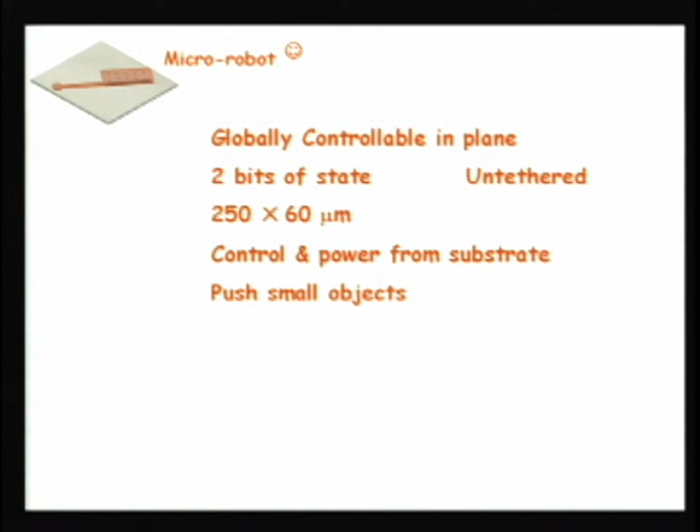But someone might say, I don't really think it's as small as you say it is, because I don't like this grid. This grid is huge, right? It's got this big wafer, and it's not completely autonomous, it's got a grid behind it. Now, this makes me very unhappy. I don't like this criticism, and there's not a lot I can say.

But what I will say is, well, there's a solar-powered robot, and I usually don't think of its mass as including the mass of the sun. And I am not a robot, but I'm a life form that breathes oxygen, and I usually count my mass as being around 175 pounds, and I usually do not count the weight of the atmosphere. So I think that's a little unfair in some sense. I don't know where it's written down that you have to carry your power supply around with you all the time, but okay, so there are things you can say, but they're sort of ad hominem.

So on the other hand, if I have hundreds of micro-robots and they're covering the wafer, then I'm schizophrenic. I don't mind calling the wafer part of the robot because I actually really like multiple robots, that's kind of what I want to do. So in other words, I think maybe the right measure is the ratio of the robots to the size of the grid or something. So somehow in this context, I don't mind it because basically the area of the robots is similar to the area of the wafer. But I object to it over here.

So another way of looking at what we have is a very mechanical engineering control way of thinking about it. What we've really built, and this is a joint, is what's called a Reuleaux pair. It's a lower pair, two things that have 3 degrees of freedom relative to each other. They can translate in 2 dimensions, and they can rotate. I actually really like this characterization because it really says exactly what we've built: a completely controllable joint. And since joints are useful everywhere in science, engineering, and technology, we can quantify what we have. So I think that's another way of saying what this device is. It's not quite as exciting as robot, but I think it's a good thing.

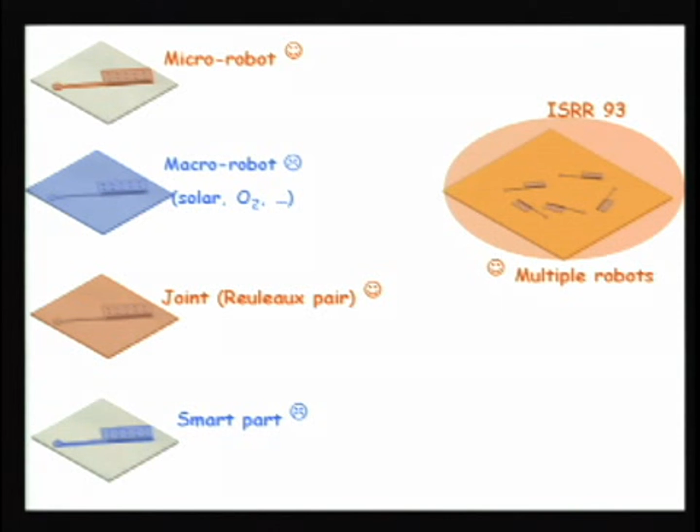Someone might say, well, what you really built is a smart part. It's a very clever part, but really the intelligence is in the field, right? You built a part that reacts to the field, and it's moving around in this way, and maybe you could do other things. I don't like this at all, this makes me very unhappy. So I think it's more of an actuator, or at least I think it's a robot. It's at least an actuator. I don't think it's a smart part.

But on the other hand, here's the schizophrenic part. I spent many years with my student Karl, and what we tried to do was basically characterize extremely fancy vector fields that could be used to manipulate parts that were passive.

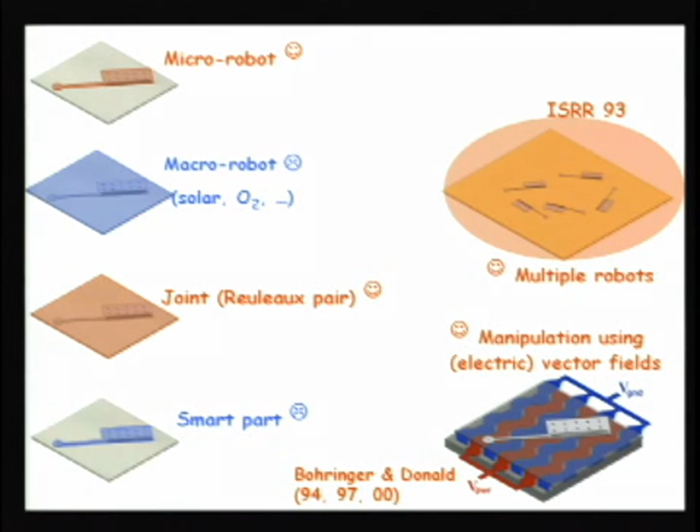And there's a deep theory there and a lot of deep practice as well. So somehow the exploration of the kind of fancy fields one would have kind of makes me happy. But the idea that the field is simple and the part is smart kind of makes me unhappy. So I still like this, but there are different ways of looking at this, and this isn't really a personal thing.

Really, this gets down to what is a robot. And I think it should be based on tasks, like global controllability and quantifiable properties like size. But I think this gets down to your notion of what you're trying to build, what is a robot at this level.

This is a good guy, right? But people are staking out their turf. So let me respond to that. It's true, there are smaller things that work in the water. Now, the smaller things in the water are both more robots and less robots. They're more robots because they do more actuation. They float around, and they can grab onto things, do chemical reactions, grab onto cells. They do clever stuff, but they're not controllable. They drift, right? So it depends on what you want.

If you want something you can steer like a car, like Fantastic Voyage, you won't find it at Berkeley. But if you want something that has actuators that will give you global controllability, I mean, you can actually do reactions, right? Our thing doesn't do any chemical reactions. So there's a trade-off between the effectors glued to this thing and the ability to globally pose it. But when you read these things, I didn't even give you the quotes from the New York Times, which are quite a bit more ridiculous than this, but there's always something to parse here, and it's part of the scientific culture.

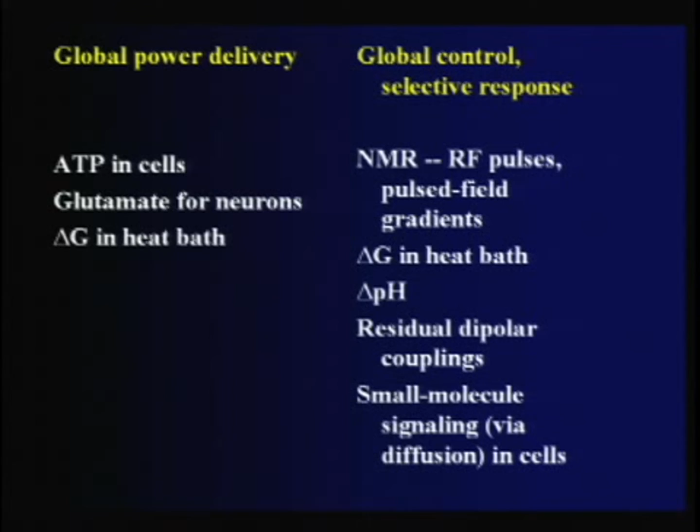The fact that we have this rich vocabulary of control means these robots are much more controllable than other robots of even comparable scales, so we can explore control paradigms where we can't individually address the devices. I think we'll need to do that as we get smaller and smaller. So this is kind of a simulation of what we'll have to do eventually.

Hopefully useful immediately. Now, again, here are pictures of devices that I didn't build. Well, actually, I did build these because this is protein engineering. So I had someplace to start from.

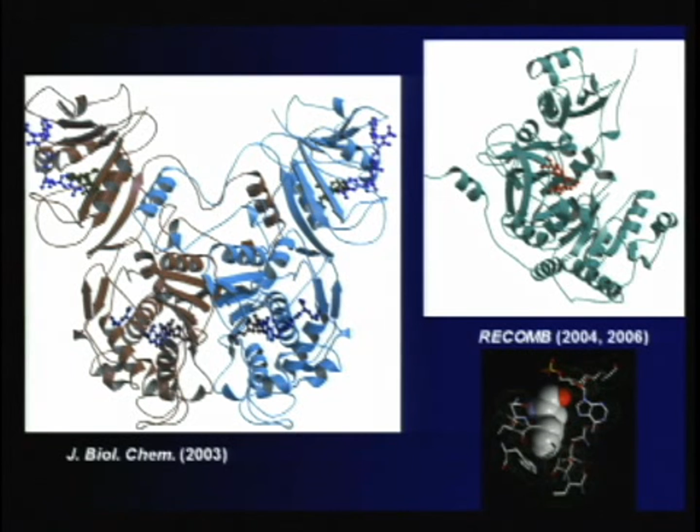So these are devices that have global power delivery, and they have global control and selective response. I think our devices doing that is not an unreasonable thing as a place to explore. Now, how close are our devices to things like this? They're a fair ways off, but it's not inconceivable.

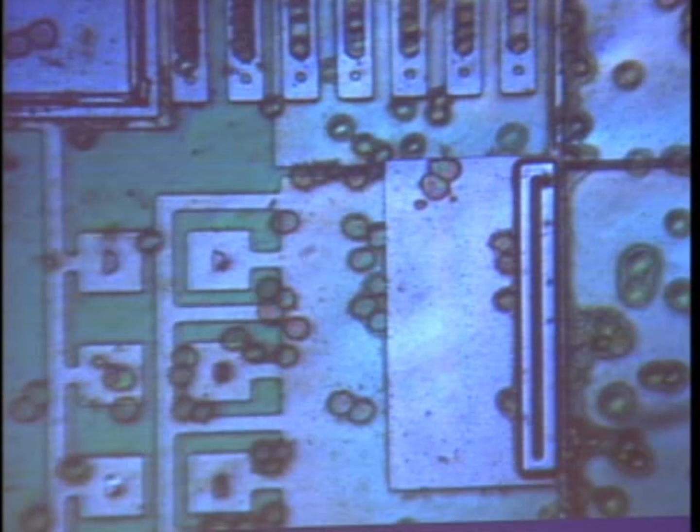Now, there are lots of other MEMS projects that do interact with cells directly—I'm talking about our devices. But that's where we'd like to go in the future, to ask: can these be used to assist in laboratory techniques like protein design, manipulation of cells, and biomedical engineering?

So I want to conclude by saying what you might take away, which is that there's a lot of promise for micro and nanotechnology, and you can be very application-driven, but I also think it's interesting to be task-driven and to say, well, if you really wanted to build a car, what does it have to do? It has to have controllability, and it drives you to some very interesting engineering problems that I think are generally applicable.

Some of these are: can you develop new processes? Can you develop new control paradigms? Can you develop new devices in some sense? Putting these all together does result in things like microrobots that are much smaller by 1 or 2 orders of magnitude than existing systems that do similar kinds of jobs.

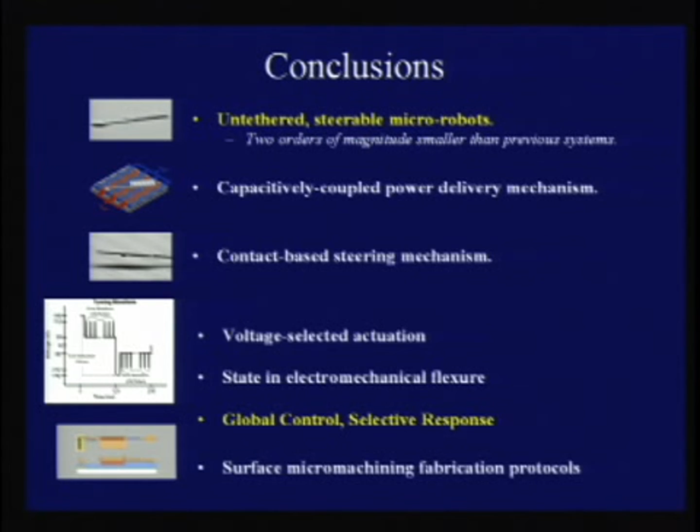I think that in the next probably 5 or 10 years, we'll see these kind of things reduced to be even smaller and hopefully be able to do some useful things in the laboratory and in the clinic. And that's what I hope to be talking to you about 10 years from now.